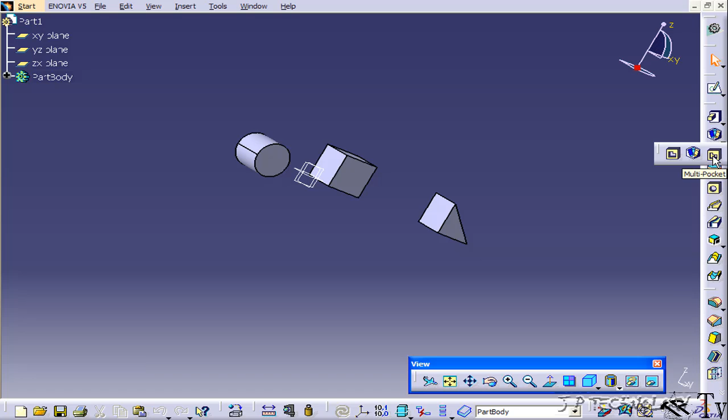This is tutorial number 44, and it covers how to use the multi-pocket feature within Catia v5. To start off, open up tutorial part number 42, which is located on the DVD. So to find the multi-pocket, it's either on the toolbar here, or you can find it if you go to Insert, Sketch-Based Features, and Multi-Pocket.

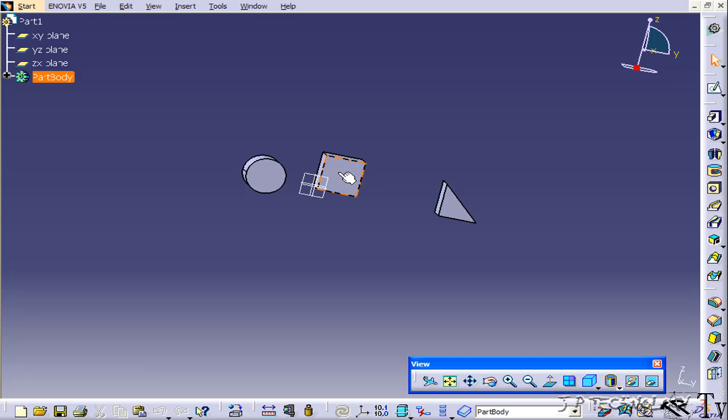So the multi-pocket works just like the multi-pad that we used in the last tutorial. So you're able to create one sketch with multiple closed profiles, and from those closed profiles you're able to use the pocket to cut into an object at different lengths and heights. So to start off, let's click the face of the square right here. Let's click Sketch, and we'll zoom in, and let's draw a bunch of little squares on the face.

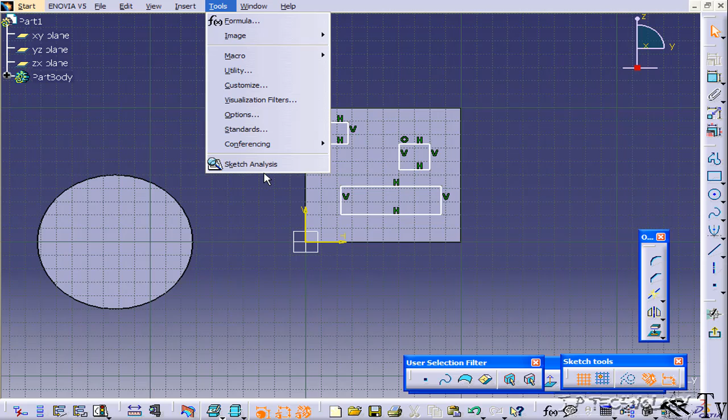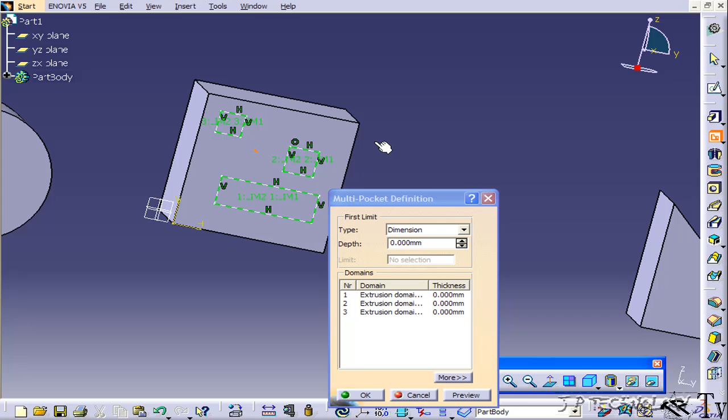Now we've got 3. Now let's check our sketch tools, so our sketch analysis. And just so you know, you've got 3 closed profiles that you're able to either cut or extrude with. So let's close this, and let's go back to our other workbench. And let's use the multi-pocket. And what we're going to do is we're going to cut into this part at different heights.

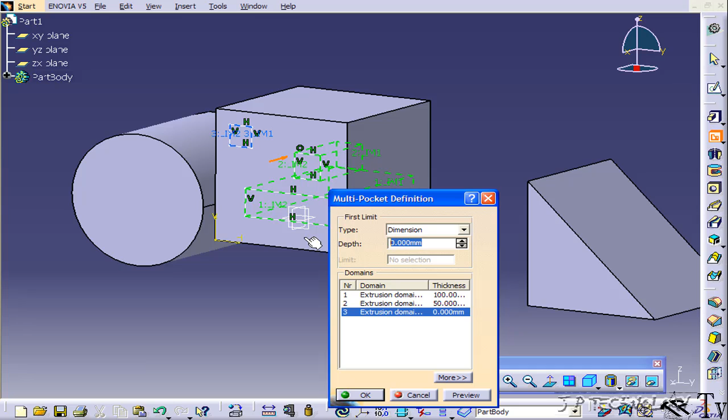So let's click the first one, and you'll see it highlighted in blue. And let's cut this one all the way through. So let's type in 100, click preview, and if you rotate it around you can see that it's gone all the way through. Let's click this one, and let's make it 50, and we'll click this one, and we'll make it 20. Now we'll click OK, and if we look through you can see that we have 3 different cuts at different lengths from the one original sketch.

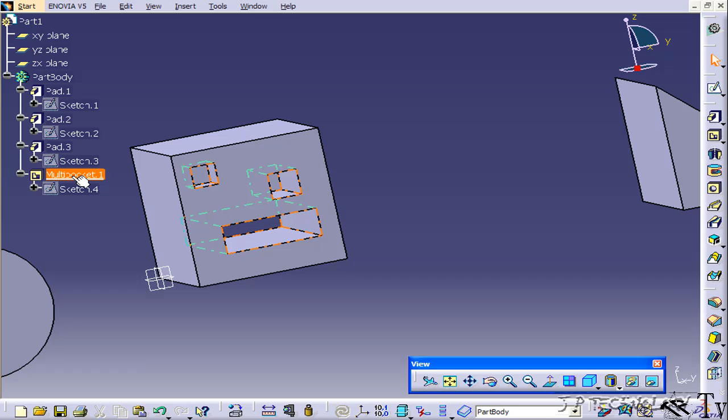Now if we open the part body, we can see that we have the one multi-pocket, and if we double click on it we're able to change the dimensions. So let's click this 100 one, and let's put it to 50, click OK, and now it's only at 50, halfway through. Now let's click this face here, and let's click the sketch, and let's draw a bunch of other little squares.

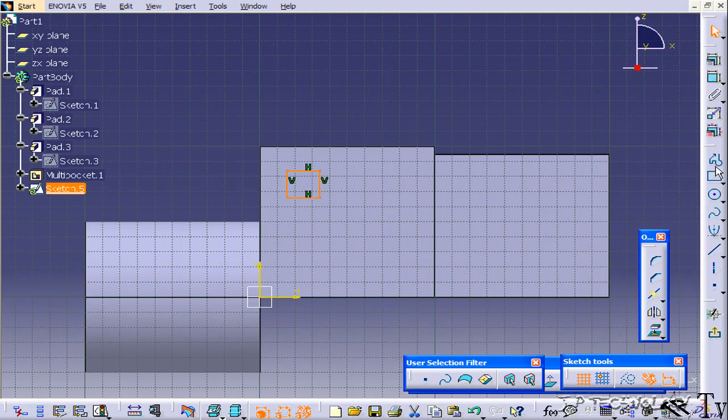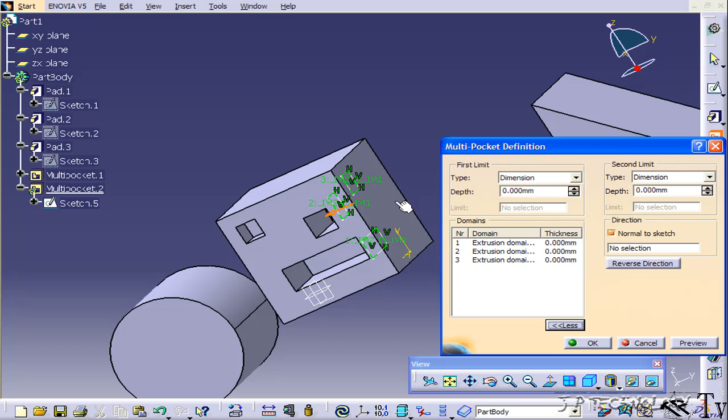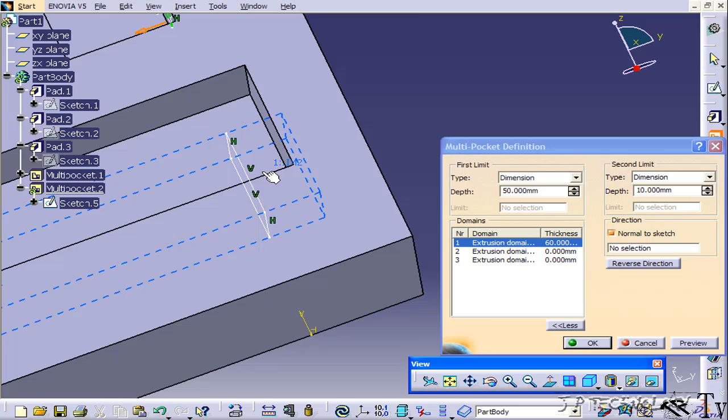And let's go back up, and now, if you can see on the side, they're in plane with this face there. Let's click the multi-pocket again, and this time let's click more. So for each one that we choose, we're able to choose how far it cuts either way. So right now we have the one in blue highlighted there, so we'll change this to 50, and we'll put this one to 10. And if we click preview, you can see that this guy is going to go from that plane there, 50 that way, 10 that way.

Now let's choose the second one, and we'll make it go 100, so it's going to cut all the way through. And the other one, we're going to make it go 50, but it's going to cut in the other direction all the way through. So you can see that from this multi-pocket, we're able to cut both ways, one way or the other way, all at once. So you're able to get a large degree of freedom when you're trying to cut, say, from the middle of an object out.

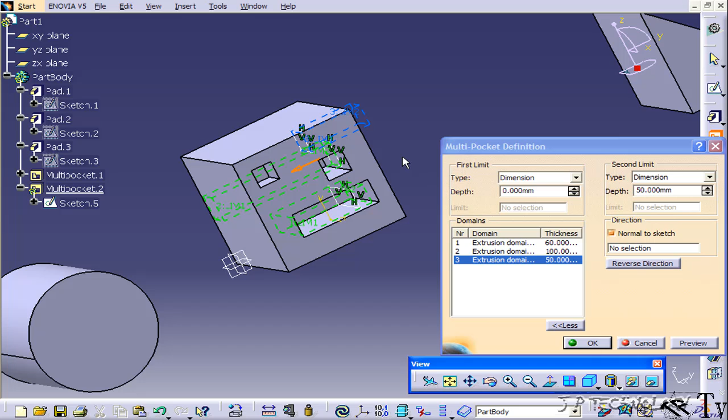So let's click OK. And you can see how we cut through that way, and this guy's cut down the middle. So let's click the circle, and let's make 3 circles inside of it. Let's click one circle there, one circle there, and let's make one closer to the edge that's outside.

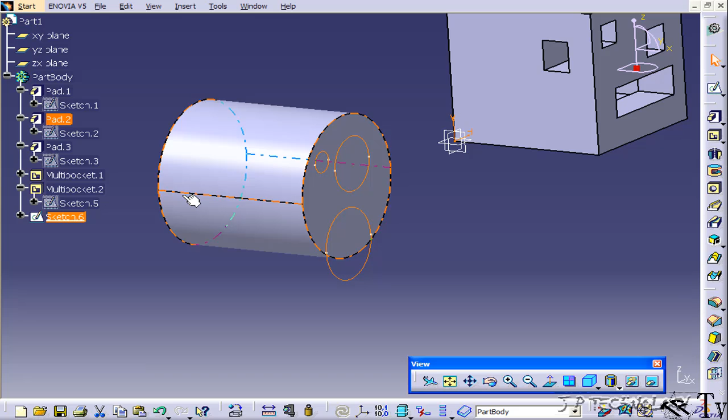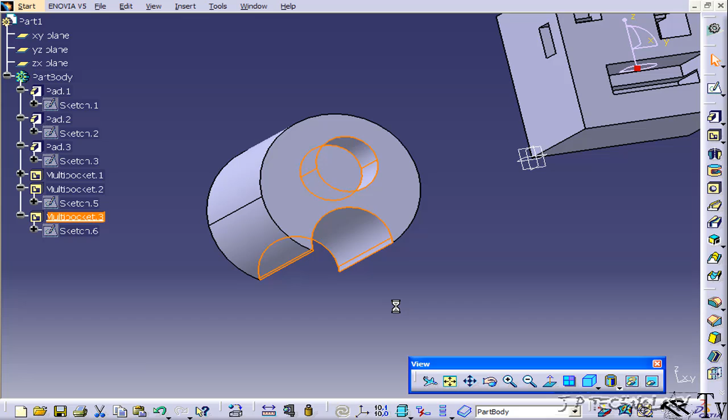Now let's go out, and let's click the multi-pocket, and let's make some more pockets again. So let's choose number 1, and let's make it 50. Number 2 we'll make 30, and number 3 we'll make 100. Click OK. And what happened to number 1?

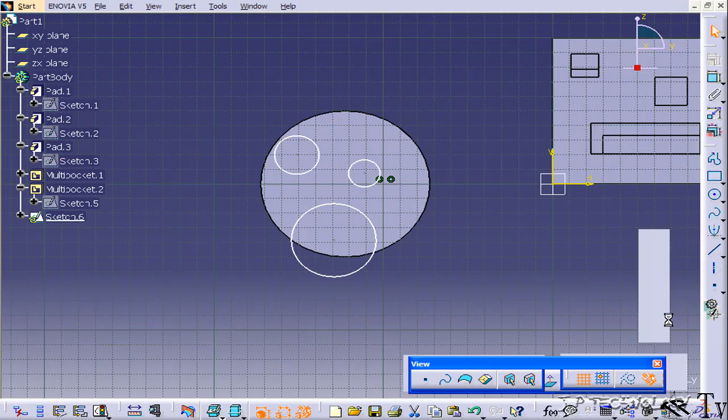And we'll click on the circle, and let's make some circles on the face. So just make 3 circles anywhere on this face. I'm going to pull one that's out a little bit too. And let's go back to the workbench, and let's click the multi-pocket, and let's cut all three of these.

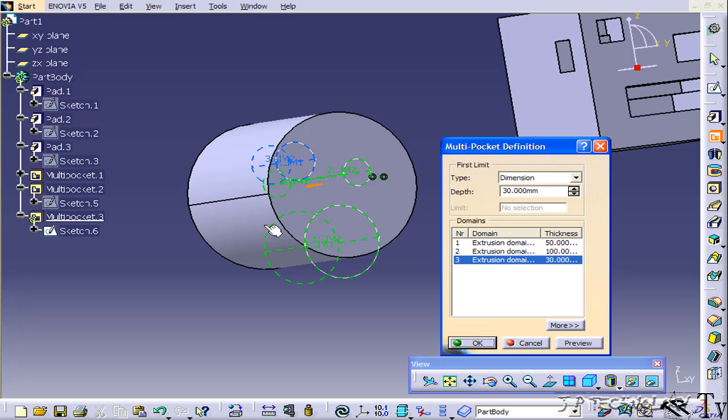So for number 1, let's make it 50. For number 2, let's make it 100. And number 3, let's make it 30. Now let's click preview, and you can see where all of these guys are going. Click OK. And again, we've done 3 cuts from the one sketch.

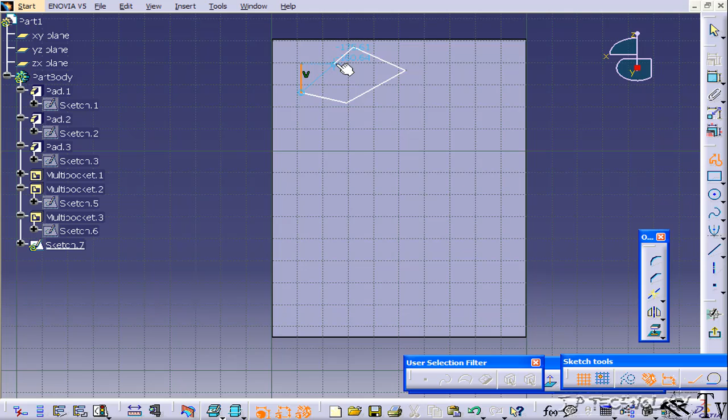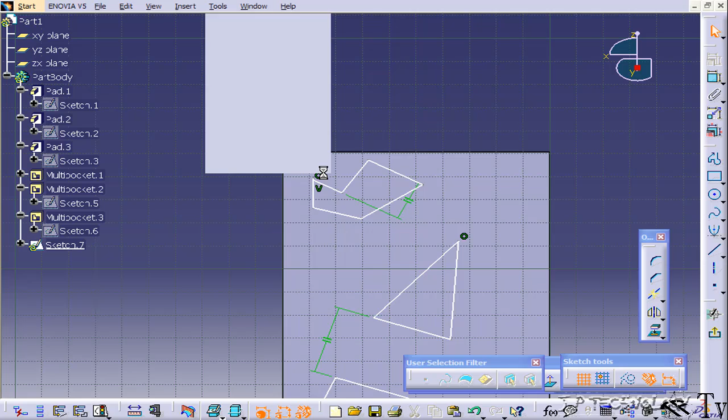Now let's click on this face here, click sketch. Now let's zoom in and let's make 3 unique profiles. And one more profile. Now you can see that this one up here isn't completely closed. Now if we go to our sketch tools and click sketch analysis, it's going to show that we have a problem with it. So let's close this and let's just change this.

So let's delete this line here and let's just close it up. So again, it's very important that you use that sketch analysis tool just to make sure that everything's closed. So we'll check one more time, sketch analysis, everything's closed. Now let's go back up to the workbench and let's use the multi-pocket again.

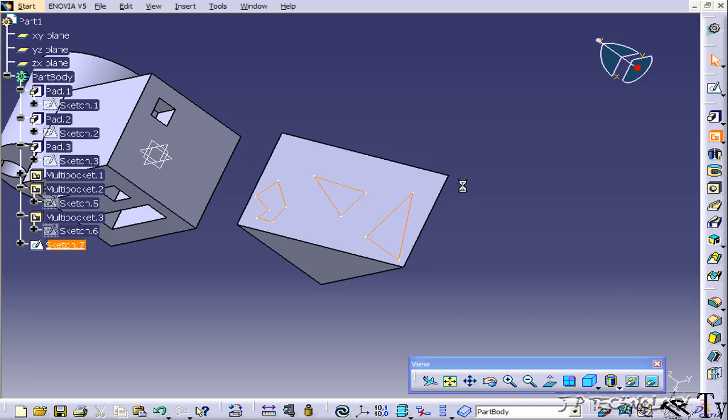The first one we'll make 10. Second one will make it 20. And the third will make it 30. Click OK. And now we've made our 3 cuts again with the multi-pocket into the part.

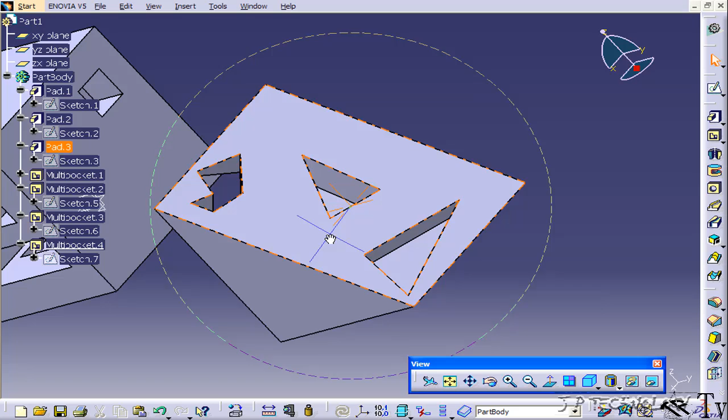So again, just like the multi-pad, the multi-pocket allows you to save some time, as from one sketch you're able to cut out multiple profiles. So you can go from 2 up to whatever, say 100 profiles, and you're able to use just one sketch and one feature to cut out all those different profiles. So this tool is potentially a very big time saver. And this concludes our tutorial on how to use the multi-pocket feature within CATIA V5.